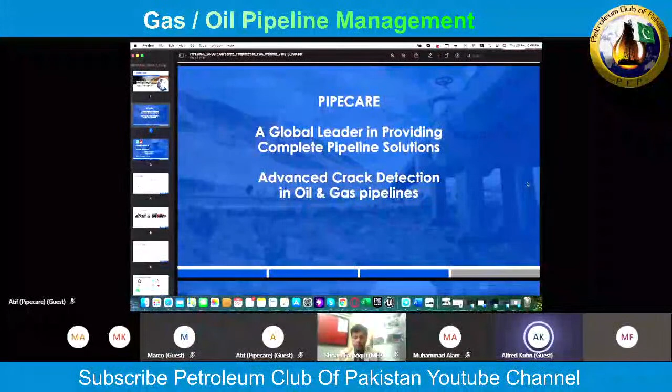Before we begin with the webinar, I would like to take the advantage to have a brief safety moment, because safety is above all in what we are doing in business and in private life. Because we have now experienced more than one year of this pandemic and it is still going on, we need to be reminded that we cannot let our guards down. Although people are getting tired of all these restrictions in traveling, in social meetings and everything, we cannot let our guards down. We need to wear our masks properly. We need to practice social distancing and follow the rules which have been set to protect us and others. That was the safety moment for today.

With the next slide, I give a brief introduction to what we, Pipecare, are doing. The core of our business is inline inspection, where we are proud to offer all technologies from caliper to magnetic tools to ultrasonic tools, combo tools, and accessories. We are especially proud that all these tools have been developed and built in-house, also the related software.

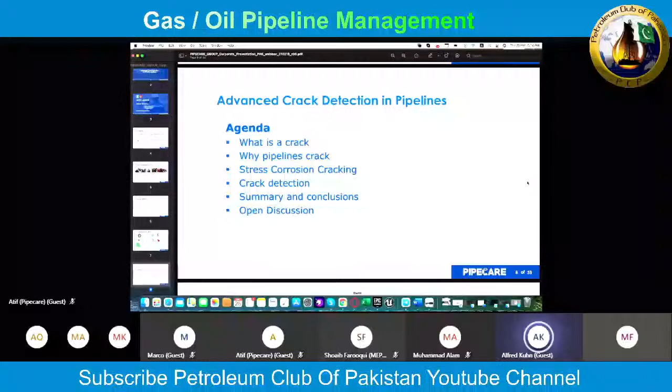What I said in the beginning, we are proud that we can offer all tool types. So it doesn't matter which challenge you have, we can bring you the right tool. There's no need for compromise. We have the right tool at hand that you need to help you overcome your challenges. Next, please.

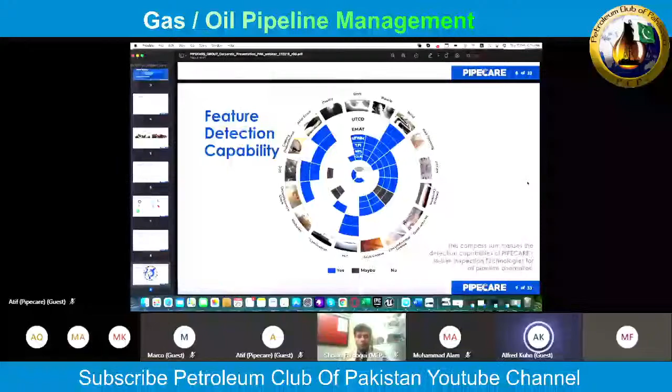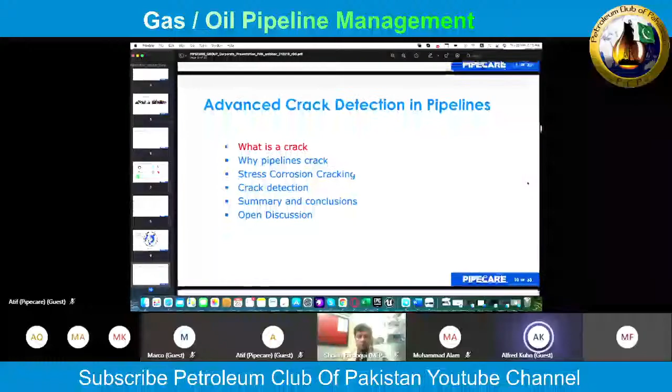So first of all, we need to talk about what a crack is. Next slide. Unfortunately, as we have only a PDF available, you see the full slide, which would normally be showing up in steps. But independent of that, I'm using the definition from the Pipeline Operators Forum for crack and crack-like feature.

A crack is a planar two-dimensional anomaly feature with a high length-to-width ratio, a sharp root radius, and a possible displacement surface opening smaller than 0.1 millimeter of the fracture surface. You see a drawing where a crack is indicated, and this may even still be closed, so no opening at all. You also see some lines, and these lines represent the magnetic lines of a magnetic tool which passes this crack. And you see that the magnetic field just passes through that crack without being deflected.

Whereas if we look at the crack-like feature, which has a similar definition, the dimensions of the opening are different. The dimensions are between 0.1 and 1 millimeter opening of the fracture surface. And this is enough to deflect the magnetic field and give an indication to the sensor of a magnetic tool.

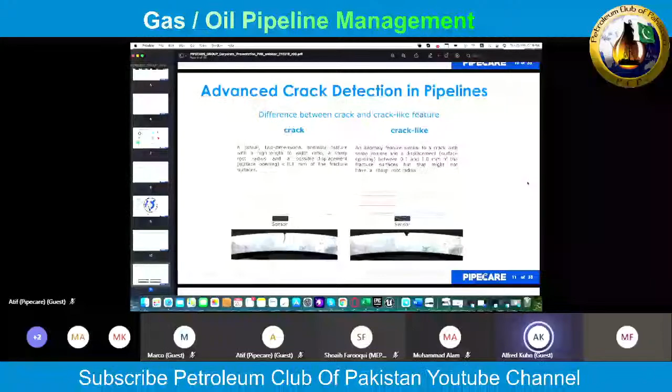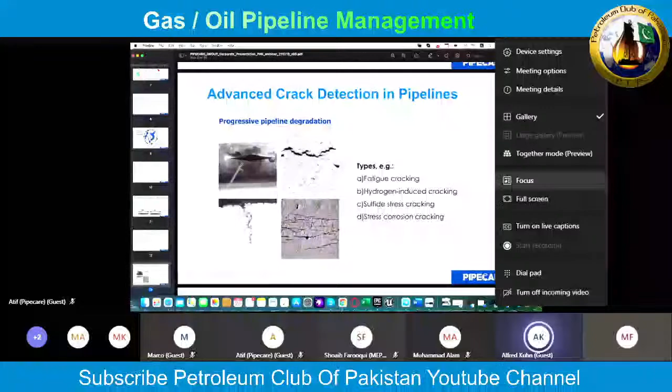What kind of cracks do we have? Cracks are normally not in the pipeline right from the start. We can have fatigue cracking, which is a bit outstanding compared to other crack types, because it happens when the metal is repeatedly stressed. It's easy to explain: if you have a paper clip and bend it several times, it gets hot, gets brittle, and after some time it breaks. This is exactly what happens with fatigue cracking. So if a pipeline has a very high pressure cycle - meaning a high number of cycles and high differential pressure - then this pipeline may be threatened by fatigue cracking.

Other crack types which happen many times are hydrogen-induced cracking, sulfide stress cracking, and stress corrosion cracking.

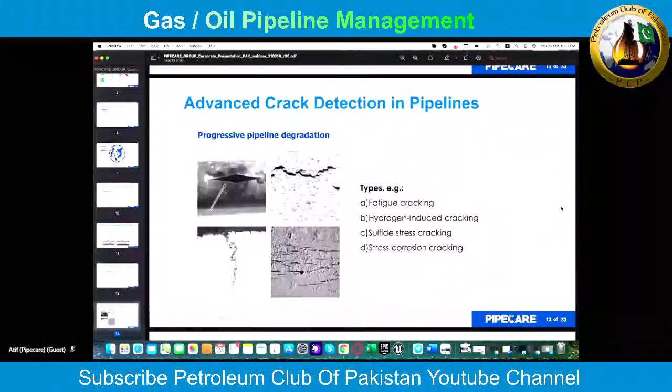The risk with cracks, and what makes them so dangerous, is how they propagate. What is common to all cracks, and also corrosion features, is that they need a break in the protection. There needs to be a break in the pipeline insulation, in the coating. There needs to be a liquid together with that, and a certain temperature. This may initiate crack growth.

In the beginning, this crack behaves like a metal loss feature. It starts growing as a pit, but then, depending on the metal structure, it can start growing in length and depth. The big difference between cracks and metal loss features is that in a metal loss feature you have a significant amount of metal loss, whereas in a crack the amount of metal loss is very, very small. Cracks grow over a certain period of time, and all of a sudden they start an exponential growth, leading to unexpected and sudden failure. This is what makes cracks so dangerous.

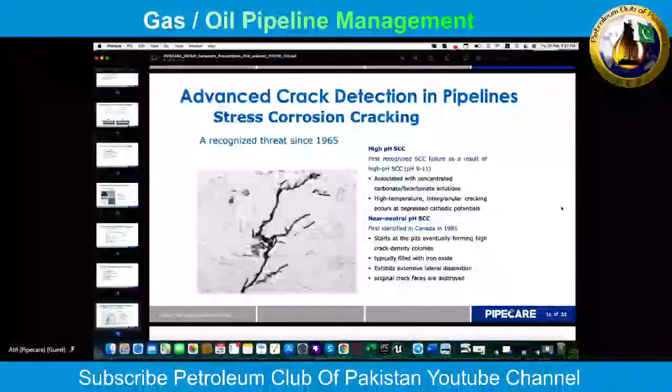I'd like to add that in the last 2 years, the industry has moved from only detecting axial cracks to also detecting circumferential cracks. Our tool can do both with a very quick change of the sensor carrier in the field. Within 1 day, our tool can be reconfigured to run either in axial crack detection or circumferential crack detection mode.

Now we need to understand what is special about the crack detection tool. Why can't we use our standard ultrasonic wall thickness measurement tool? The explanation is that the UTWM tool sends the ultrasound perpendicular to the pipe wall.

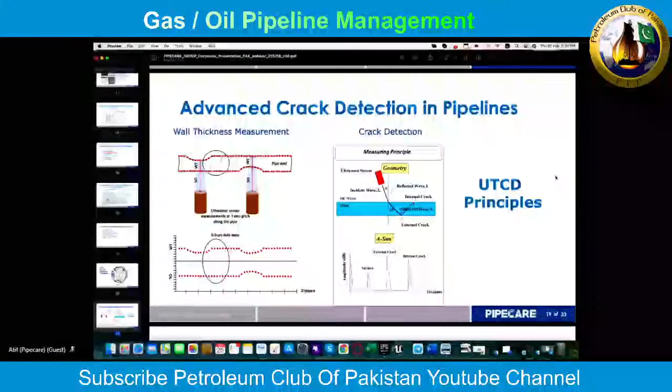What is important is that cracks need to be detected from both sides. This is why we have sensors mounted in 2 directions, so that cracks are seen from both sides. We also have wall thickness measurement sensors on a crack detection tool, but not in an amount that we could do a full metal loss assessment. These are important to help the data analyst in detecting the size of a crack, meaning the length and the depth of a crack.

The industry has moved from giving the depth of cracks in bands, which was the practice in the past - bands of 0 to 1, 1 to 2, 2 to 4, or larger than 4 millimeters. We are now giving distinct sizes of the crack depth, which has an impact on the crack assessments, because when bands were given, the worst case always had to be taken. So even if a crack was 2.1 millimeters, because the bandwidth was from 2 to 4, the assessment always used the worst case, meaning 4 millimeters.

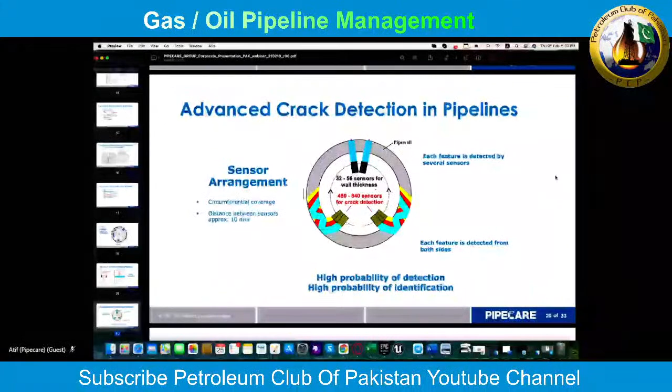I would like to emphasize again here that we are always working with conservative approaches. So even if a feature reaches ERF1 or AAF1, this does not mean that this feature immediately fails. It is an indication that this feature needs to be taken care of. All codes and standards in the industry are conservative. We are also working with additional safety factors, so everything is done to prevent a rupture or a leak from happening. But once these limits are reached, then it is high time to take appropriate measures.

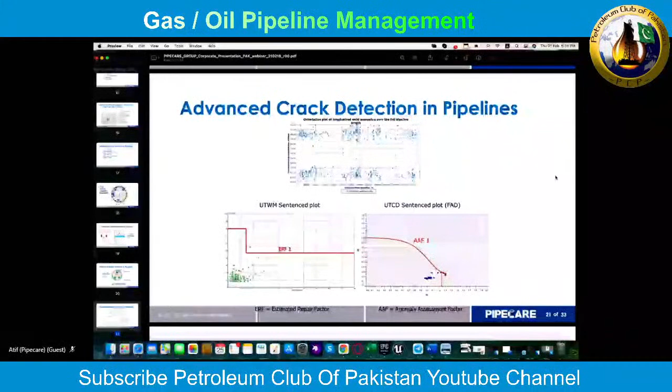Now we come to the EMAT tool, which is also a tool for crack detection, but a very special tool. The ultrasonic crack detection tool, as it uses ultrasound, needs a liquid couplant. And this causes a headache for all gas pipeline operators, because no gas pipeline operator wants to have a liquid in the pipeline, because this requires dewatering, drying, meaning additional expenditure. Of course, there is the option to run a batch with an ultrasonic crack detection tool, but still the pipeline needs to be cleaned up afterwards, needs to be dried before the normal operation can be restored.

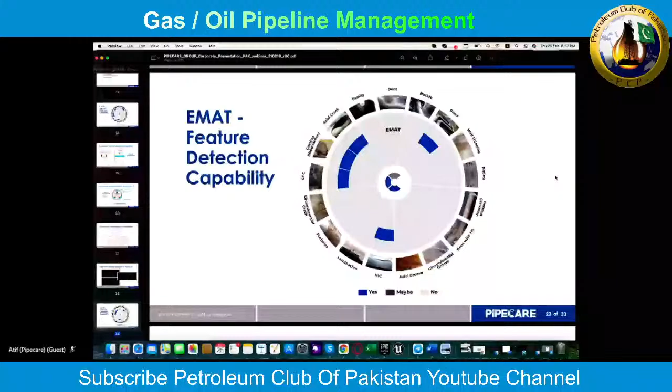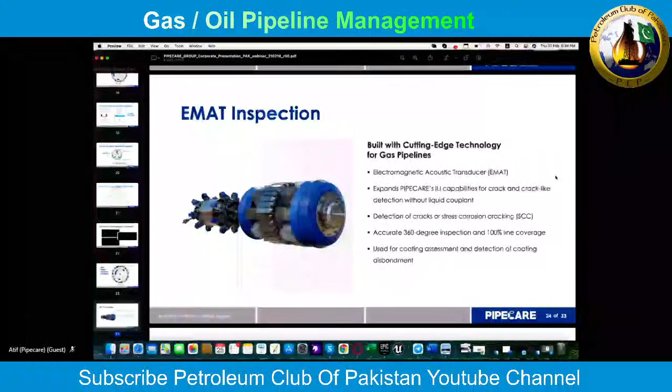This is how the EMAT tool looks. And for those of you who are familiar with inline inspection tools, it resembles a little bit an MFL tool, a tool which is used for metal loss inspection, and rightly so. Because also on the EMAT tool, magnetic fields are used, and electromagnetic fields are used.

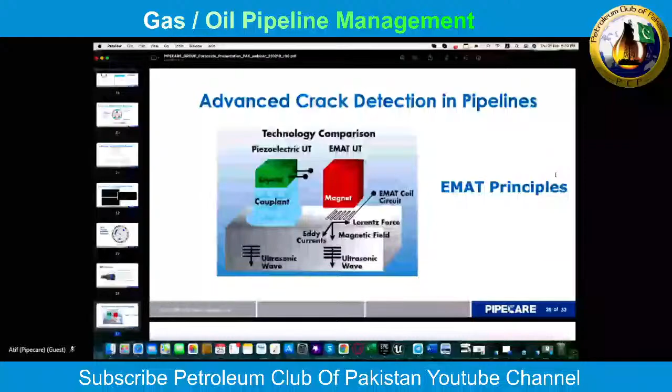So what's happening is that one of two methods can be used. One is using Lorentz force, one is using magnetostriction. The result of both methods is the same, that the metal grid is oscillating and creating an ultrasound or even different types of ultrasound inside the pipe wall. The difference between the Lorentz force and the magnetostriction is that magnetostriction has certain advantages, as it creates a static magnetic field and an oscillating electromagnetic field. This has benefits when it comes to better signal-to-noise ratio of the reflected signals.

The Lorentz force method requires that the sensor is much closer to the pipe wall, maximum 2 millimeters, to work effectively, whereas the magnetostriction method works also very well at a distance of 4 millimeters. You understand that these are very, very small distances to the pipe wall, and this was one of the reasons why it took a long time to develop EMAT tools which can inspect long distances of pipe, let's say 7 to 100 kilometers. The reason is that the transducers need to be protected from damage, and to find the right material was a big challenge.

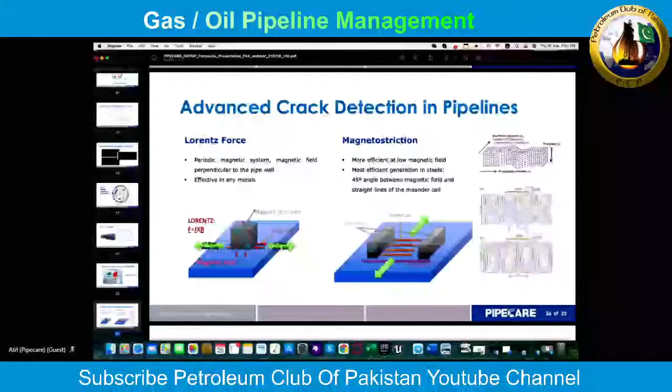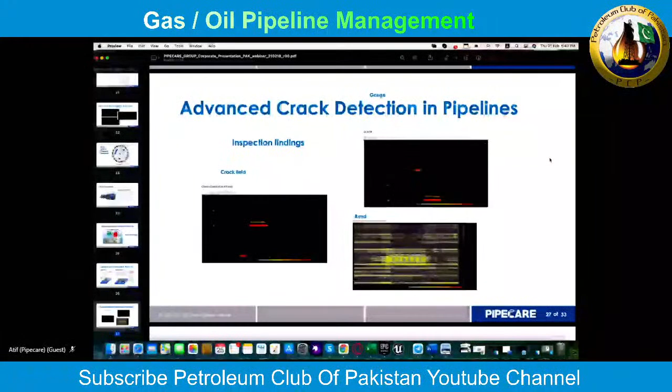And the coating disbondment is determined by checking the amplitude of the reflected signals. Because when the coating is disbonded, the reflected signal is stronger, approximately 2 dB stronger than a signal which is reflected from a pipe wall which has a coating.

Now, of course, there is a certain area required to be certain that there is a coating disbondment, and this area is approximately 6 by 6 centimeters. Only if there is a total disbondment of that area can we be sure that there is really a coating disbondment.

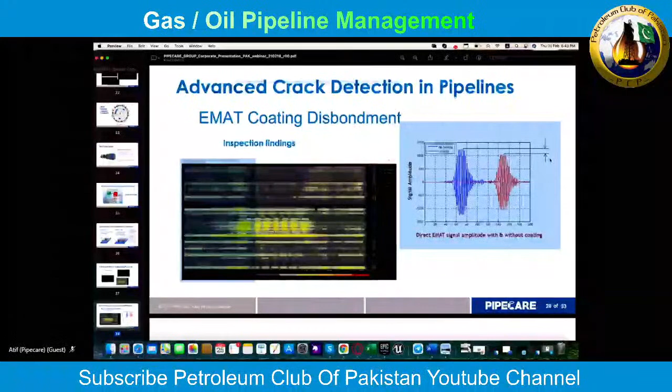The results of both tools are on the same level. This was one of the requirements when the EMAT tool was developed. It should be on the same confidence level as the ultrasonic crack detection tool. And both methods give reliable information on cracks in pipelines, especially on stress corrosion cracking.

One recommendation when you are planning to do a crack detection inspection: always make sure that you have a metal loss inspection done either at the same time or not longer than 1 year behind. And this is for a reason. Metal loss features, general corrosion, is a random process, and these features may develop sharp edges. And the sharp edge may be interpreted by the ultrasonic crack detection tool and therefore the analyst as a crack

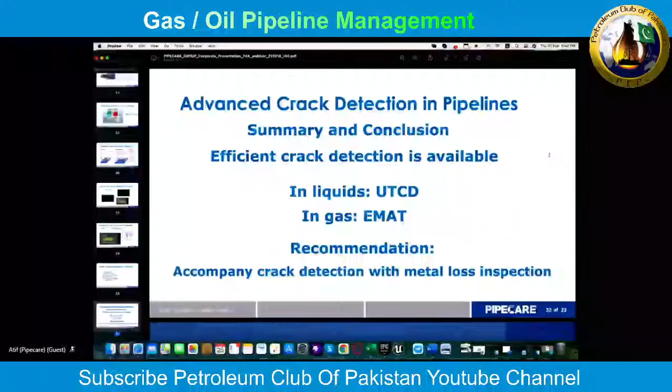In summary, we are here to help you with your challenges. And don't think that the challenge is too big for us. There are no unpiggable pipelines anymore. Every pipeline is piggable. They may be difficult to inspect, but if it is required, there is a solution for that. So we do not need to have any pipelines uninspected anymore.

And we are providing solutions, and we are not leaving you alone after an inspection. We help you further to interpret the inspection results, to look at what can be done to keep your pipeline safe, and most important, keep the product in the pipe.

Yeah, I'd just like to know about inspection. Do you have any method for CRA pipeline, like pipe which is cladded, double lined pipe? Cladded pipe is a challenge, definitely, but it can be inspected with ultrasound tools. Pardon? Yeah. With ultrasonic tools, you can inspect cladded pipe. There's no problem there.

What is the complete method? Can you tell me the complete method, or you can send me an email through your presentation or some material so we can study, because we are facing a serious problem in assessment of the pipeline. Yeah, okay. Definitely, we can do this. Please leave your email and your question with the organizers, and they will forward to me, and I will be happy to reply.

Because we are dealing with the highest CO2 in gas, so we are using cladded pipe instead of duplex. So we have to inspect these pipelines before using any further, just to make a benchmark. So you understand what I want to say? Yes, I understand. Just as a coincidence, I had a discussion with a customer in the Caspian Sea just on Monday this week about the same topic.